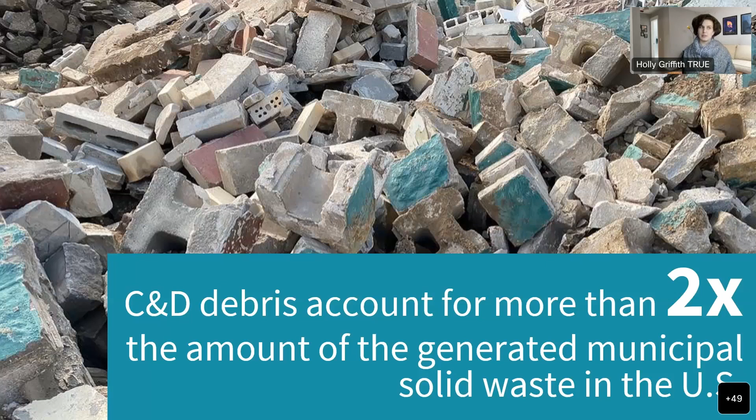We're generating a high volume of material and not diverting enough of it. And we need additional tools in place that can help support the reduction of cradle-to-grave management of material in this space. Certification is one of those tools.

Over the years, our community has identified this same need. Most recently, this was done by Genesis Marina, a 570,000 square foot commercial office and laboratory project that general contractor Webcor is delivering in Brisbane, California. This is the first TRUE pre-certified construction site. This project, alongside a couple of others, worked to adapt TRUE certification to fit their project prior to the pilot because they saw the need for dynamic zero waste in a construction setting.

But as these projects started their work, we were hearing the same thing from these teams: it was difficult to apply the standard TRUE rating system to these projects without some adaptation, particularly because TRUE is designed for existing facilities with ongoing operations, and construction projects are often new and term-limited.

Based on this feedback and our understanding of impact, TRUE saw a significant need to build something different to support zero waste in the construction sphere. There were 3 key impacts we homed in on that we can help provide support in. One, zero waste is needed at construction sites, and we can help provide a guideline for developers, architects, general contractors, and subcontractors to foster zero waste policies, practices, and strategies at their place of work.

Two, certification and the development of sector-specific adaptations can help increase the impact of zero waste practices at a wider scale. Having an achievement to shoot for and a way to reach it within the context of a specific industry can help more complex projects mobilize to improve their zero waste actions. And finally, three, we know there are construction teams doing really excellent work in the realm of zero waste, and certification can act as a recognition of this excellence, helping project teams showcase their successes.

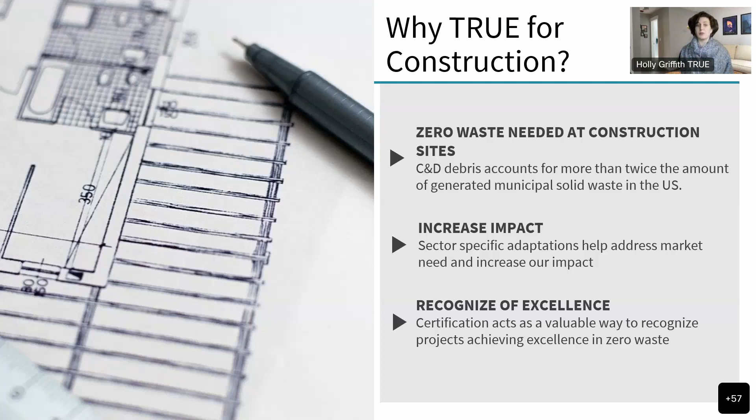For these reasons, GBCI decided to work to expand its offerings to construction facilities. And in summer of this year, we released the TRUE for Construction Projects Pilot, an adaptation of the existing TRUE rating system designed to certify new construction and major renovation projects. Through the pilot program, participating projects will evaluate their zero waste practices using the pilot guidance based on the current TRUE version 2 rating system.

By engaging with the pilot guidance, projects can ultimately earn TRUE certification for their actions and leadership, and share feedback on how we can improve along the way. This pilot will greatly inform the further refinement of a TRUE adaptation for construction projects.

So with that introduction, we can then ask, what does TRUE for construction look like? Well, first, of course, we need to ask: what makes a TRUE project? What do we need to make sure that we can certify folks?

First, we need to make sure we're certifying the full construction project. So we ask that projects provide their data from the day construction begins all the way up to the day that occupancy is achieved. This way we can make sure we're really able to say, yes, the full construction project is meeting true zero waste targets.

Then we want to make sure that everything generated on site and all activities happening on site are reported, be it from the construction itself, the trailer, or food waste from employees. If it happens on site, we want to hear about it. This can help projects really understand the full picture of what's happening on site. As we know, zero waste means all waste—you can't pick and choose. So we really push projects to understand what they're generating, where it's going, and how they can do better.

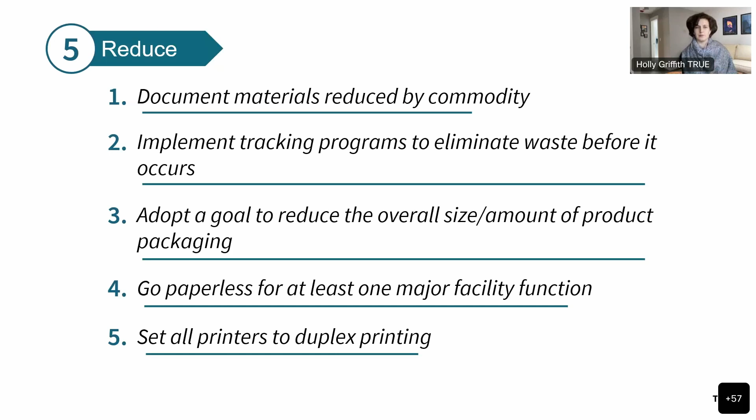Let's look at an example. Some of True is designed around the implementation of actions. Some is geared towards expanding on-site knowledge of waste practices overall. This is why we refer to it so frequently as a roadmap.

Or maybe it's identified that panelization is a strong design strategy to reduce waste. Or maybe reuse opportunities are identified through pallet and shipping container reuse, all of which may meet other True credit requirements and can be reported as part of diversion through the reduction and reuse reporting sections.

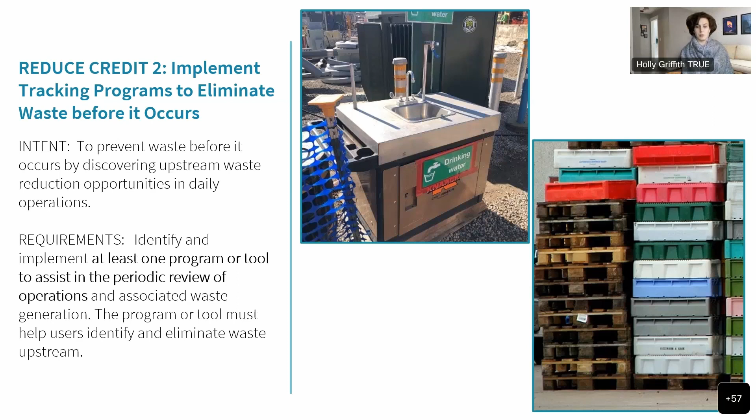In this way, True credits can feed off of one another to help project teams build towards a holistic zero waste system. For example, a project team might start with focus on Recycle Credit 1, which asks them to review all materials generated on site and assess if they're meeting their highest and best use. Maybe as part of that, they conduct a zero waste audit to assess what's really going where and if that's the best end use for that material.

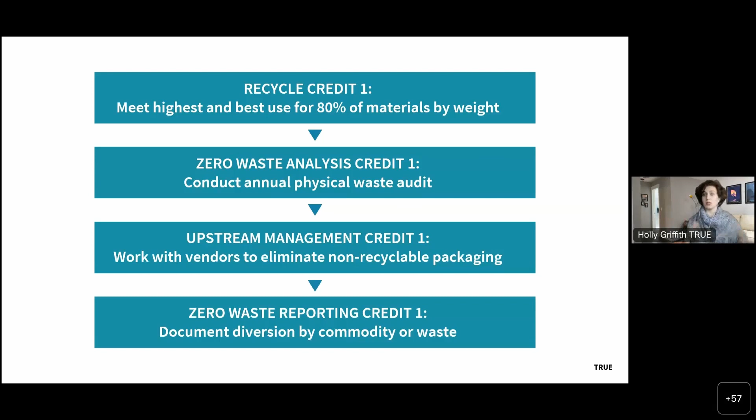During that process, the site may identify that they had a lot of non-recyclable packaging that could be made of better materials or eliminated altogether. This might address Upstream Management Credit 1, which asks sites to work with their vendors to eliminate non-recyclable packaging.

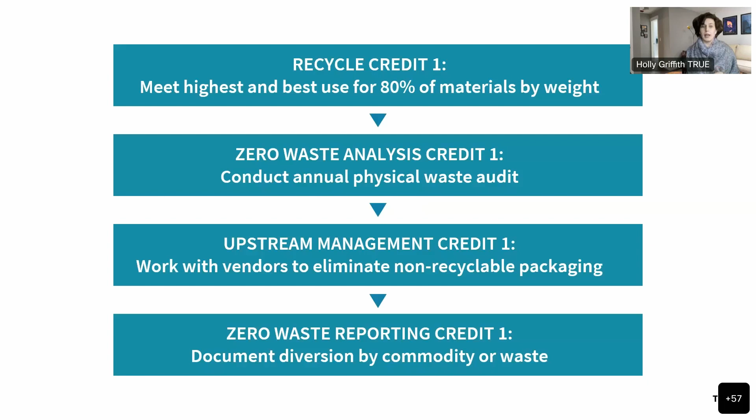Maybe the team decides to work with their vendor to have materials wrapped in metal bands rather than pallet wrap, like Webcor did, or maybe reusable pallets are implemented. Whatever it is, this can all be reported as diversion in Zero Waste Reporting Credit 1. As long as those materials are being diverted, they feed into that overall diversion number, which is why for construction, reduction and reuse are so key.

On the whole, TRUE is designed to support those linking chains, the building of best practices and strategies to create a facility or project that is taking on zero waste at all levels. It's our intent to now focus this pilot to support that goal in a construction context.

Now, to wrap us up, if you're interested in learning more, we have a few different resources put together for you. Let's talk about where you can get involved. We have 3 primary places you can look to learn more. First is our pilot resources platform, which contains resources to support the pilot, as well as updates and guidance on the process. This is the best place to see how things develop and find answers to frequently asked questions as they arise. We encourage anyone interested in the pilot to check this page frequently to see developments as they're made.

Our second resource is our webinar detailing the pilot more comprehensively. And the third is an article on our webpage, which provides a little more detail and overview on the development of the process over time. I'll share those links in the chat once I've finished today.

Finally, if you have any questions, please feel free to contact us at true@gbci.org. We're always really excited to talk about this process, so please drop us a line if you'd like to learn more.

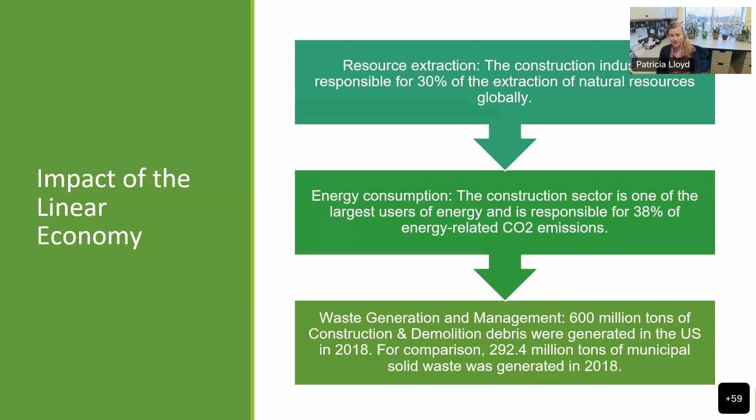Then there's waste generation and management: 600 million tons of C&D waste were generated in the US in 2018. For comparison, only 292.4 million tons of municipal waste were generated—still a lot, but you can see the mass of construction and demolition waste compared to municipal waste. It's a pretty big delta.

Next slide, please. Which means we have a tremendous opportunity. Construction is only going to increase between now and 2060 across the world—the equivalent of the city of Paris will be built every week. There are some other great metrics around this too: just in the next 3 years, annual construction waste is expected to reach 2.2 billion tons globally. So what are we going to do with all those resources?

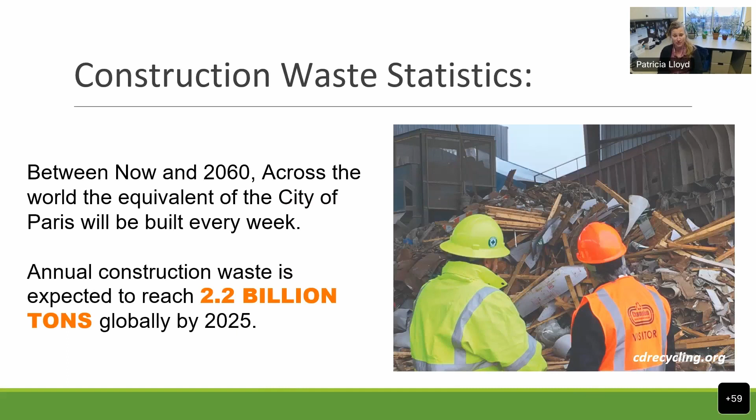Next slide, please. Annually, construction projects are dumping a lot of waste into landfills, and a lot of that is equivalent to 30% of the weight of all the building materials used to build the buildings. So even on site, we're having a tremendous amount of waste. There's a lot of material being created that is not reaching its full value on the job site. Next slide, please.

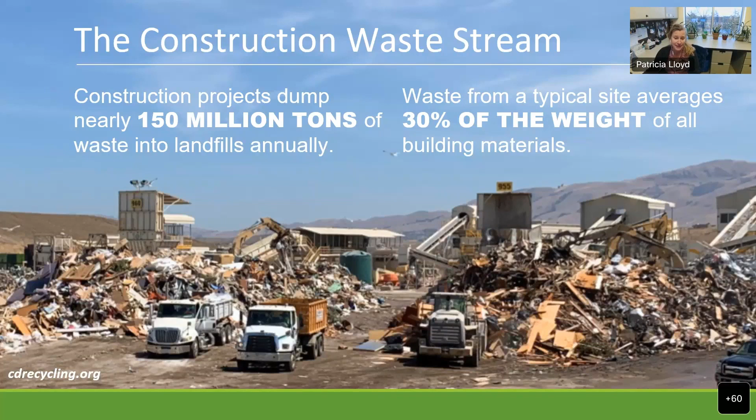There are challenges to zero waste projects, or really high diversion projects. To truly get to zero waste, if you have demolition involved, you have to have deconstruction processes. There's often not enough time in the construction schedule or enough money to selectively demolish and capture value. In the reuse market, particularly for commercial construction, there's not enough stability to make sure materials are there when they're needed. I call it the design-to-build gap: the architect looks at the project, specifies a reused material, the contractor gets awarded 8 months later, and that particular material is no longer in that reuse retailer's possession.

That's just one example of the problem. There's also inundation of certain commodities and a lack of others. A lot of these resellers are set up for the residential market, so they can't take 2,000 ceiling tiles from me.

This creates some challenges with commercial construction. But there's real reasons why commercial construction needs to be addressed, because the waste stream from commercial construction and demolition is so much greater than that from residential.

One of the things I'm going to talk about a lot today is building material reuse. And with that subject, there are quality, warranty, and hazardous unknown issues. One of the greatest barriers to deconstruction and building material reuse is cheap landfill costs.

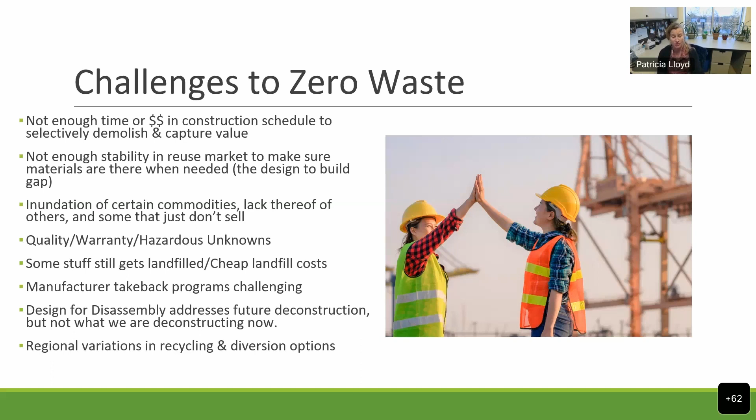The Ellen MacArthur Foundation is one of many groups that have done a tremendous amount of work on the circular economy and construction. There are three impactful circular economy strategies specific to the built environment: making better use of existing materials, designing spaces in ways that eliminate waste, and reusing and recycling materials. By applying circular economy principles to buildings and construction—sharing buildings more, reusing and recycling construction materials—we can reduce the emissions from construction materials by 38% by 2050. That's an enormous impact we have the potential to make.

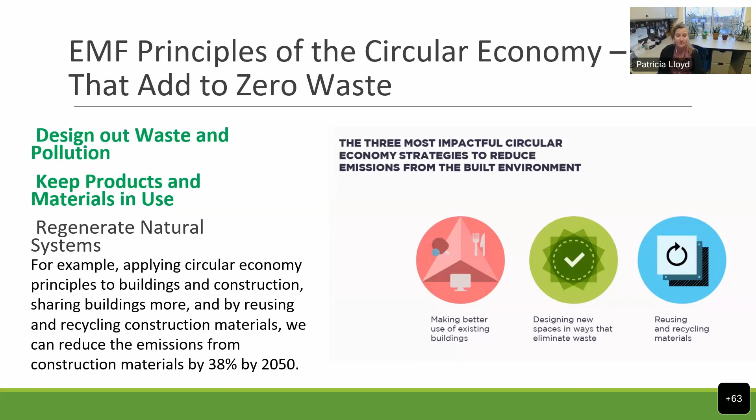This poster was done by Andrew Ellsworth. He's with Doors Unhinged in Pittsburgh, one of the only people actually salvaging materials in the commercial market and then reselling them back into it. What Andrew found through his research is a huge high-churn issue in the tenant interiors market specifically—office buildings where the lease turns over every 5 years, and those tenants come in and put in new carpet, new ceiling tile, completely new finishes.

So this creates a tremendous amount of waste, and it's very cyclical. There's tremendous opportunity to practice materials reuse strategies—salvaging those resources and getting them back into the reuse stream. Because as it's been said over and over today, recycling is not the highest and best use; reuse typically is.

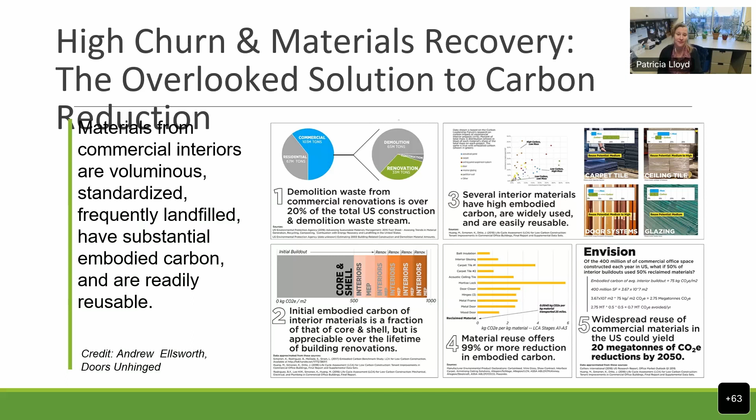There's another opportunity, which is surplus. I've been in construction for like 20 years and I'm really embarrassed to say I never recognized this as an opportunity to keep materials out of the waste stream. Surplus is materials left over at the end of a project. It's not the same as salvage because they were never installed—they're new, they have material data information on them, they're often new in box, but the amount can be significant.

Most construction contracts have a requirement for attic stock, which is materials left for the client for replacement and repairs. Sometimes those are pretty significant amounts, and the owner doesn't have anywhere to put them, so they'll get rid of them. These materials are a great stream to go straight to reuse retailers for sale.

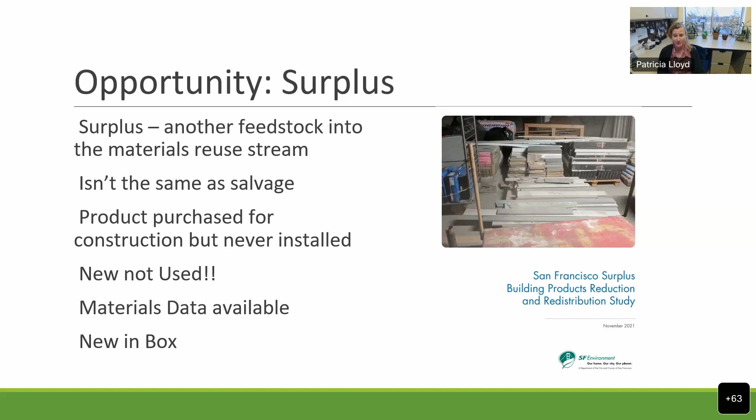There's a lot of opportunity through materials recovery via deconstruction. I love this quote from the US EPA: deconstruction is a new term to describe an old process—the selective dismantling or removal of materials from buildings prior to or instead of conventional demolition. Conventional demolition is all about clearing the space for construction in the most efficient way, both by time and cost, and that's usually what we as a GC get paid to do in our contract. So really changing that paradigm from the ownership and design perspective to include more time and dollars for it.

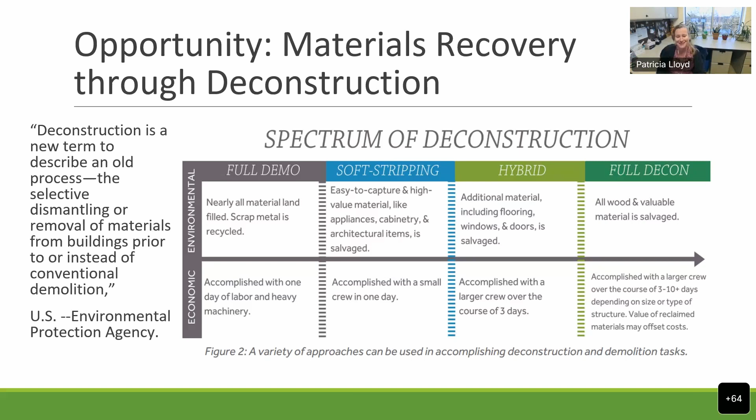Build Reuse is a great organization if you want to learn more about this. They're a national organization, and they talk about some different ways of reuse: adaptive reuse of a building's structural elements, component reuse of materials available on site, reusing construction materials from elsewhere, and secondary use of non-construction materials.

Beyond the materials, there are tremendous workforce development and community benefits. Just like Holly was talking about the pollution impacts to people living near landfills, there are also benefits to reuse beyond reducing what's put in a landfill, and that's workforce development and community benefits.

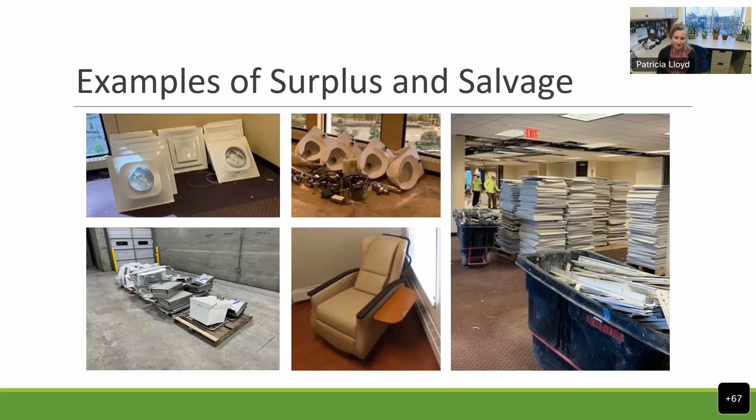It also shows who the deconstruction subs are in your site, what the ordinances are, who the haulers are, so it really helps to gain knowledge of your local reuse scene. I thought I knew everybody in my area, and I found 2 firms on the Illinois part of the list that I was unaware of. It's great stuff.

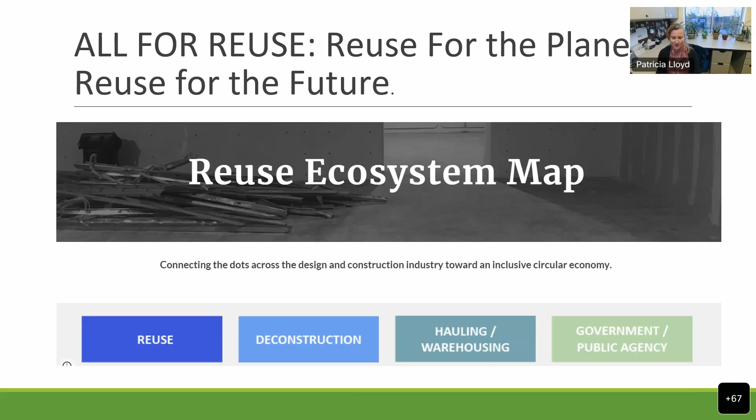We donated ceiling tiles for reuse. One of the subs took the doors, refinished them, and used them on another project. We ended up milling the asphalt parking lot—that's not reuse, that's recycling, but there was a lot of effort and planning put into it. These projects with high waste diversion just don't happen without planning and integration of the project team.

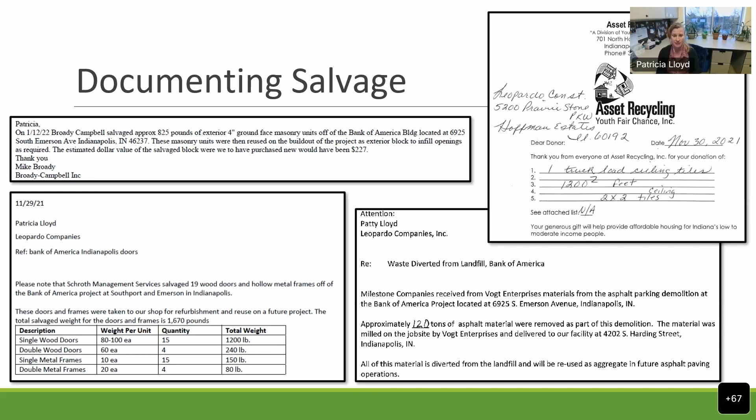So here's just an example when I say not one path. I think we had six paths on this job to get to that 96% waste diversion. This wasn't a true project, I wish it would have been. I don't think the pilot was going yet, but this is a great example of all the different organizations on one project that were engaged in hitting a high diversion and capturing all those resources, both for reuse and recycling.

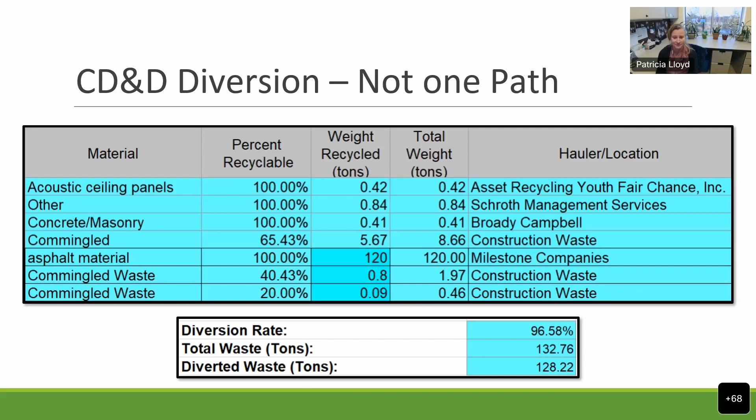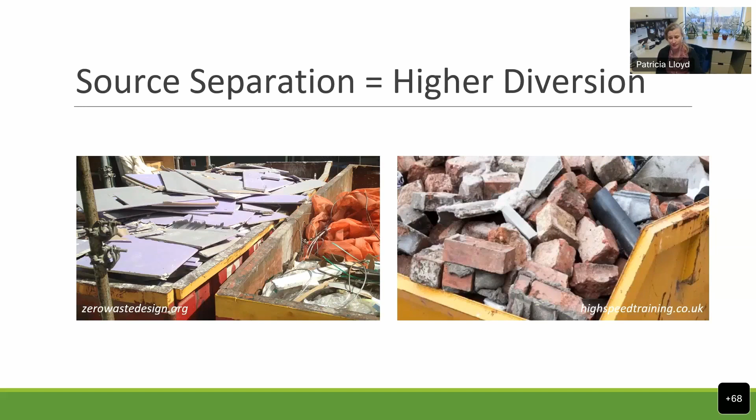The highest way to get diversion of all waste is through source separation. It's not always feasible, but I would be remiss not to talk about it. If you can source separate things, you reduce contamination. So this is a definite strategy for highest diversion and recapture of resources.

There's a lot of criteria, waste diversion, deconstruction ordinances coming around that are really going to push this industry in a very meaningful way. Understanding where there are waste diversion or deconstruction ordinances matters. I recently spoke to a deconstruction contractor, and I asked how much that deconstruction ordinance in her area had driven her business. She said 75% of my business is because of this deconstruction ordinance. So I thought that was a pretty meaningful metric.

And then I like this quote from Eden Brukman from the Department of Environment at San Francisco: material rescue and reuse epitomizes climate action for the building industry. It honors the embodied carbon by upending the prevailing linear take, make, waste pattern. I think it's really important to point out the term climate action in that phrase, because a lot of people do not connect waste diversion and resource recovery with climate action, but it certainly is. There's a ton of cities that have included zero waste, deconstruction, and principles like that in their climate action plans.

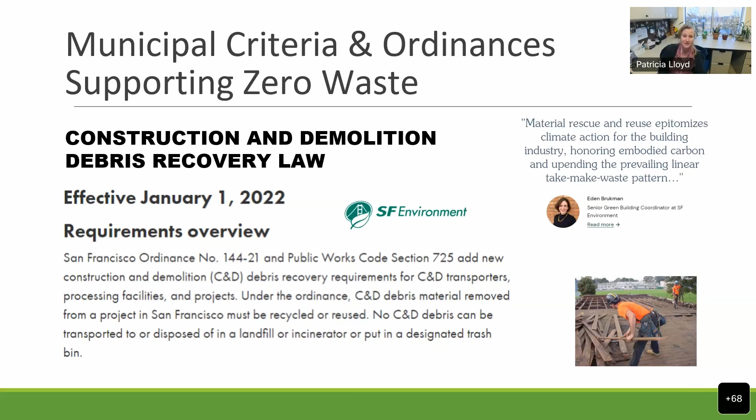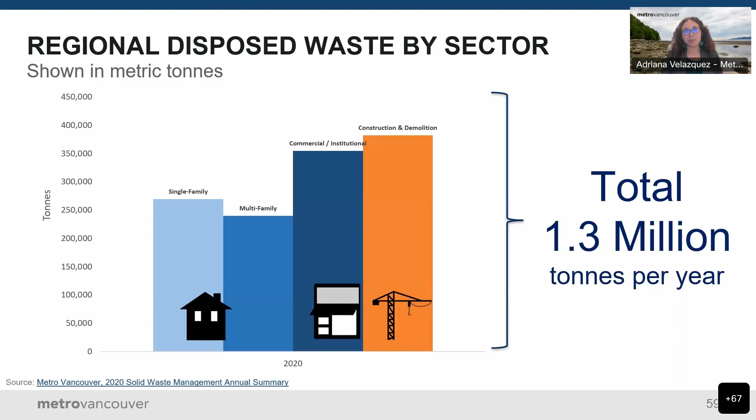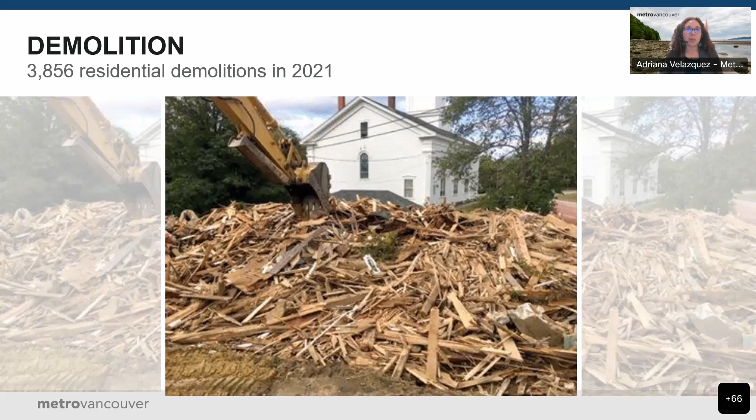In 2021, the number of residential demolitions in Metro Vancouver was higher than the previous 3 years, and it was also higher than the 10-year average. Most buildings at this point in the region are still taken down by traditional demolition methods, and as we know, this makes building materials unsuitable for reuse or recycling.

In Metro Vancouver, the C&D sector experiences a high diversion rate compared to other sectors, mainly due to recycling of concrete and asphalt. However, if we remove these two materials, the diversion rates lower significantly. There is a great opportunity to take other materials out of the garbage stream, and this is especially true for wood products.

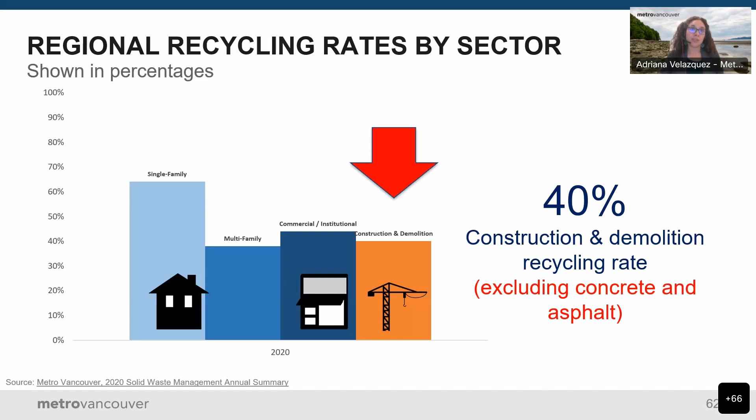Based on the 2018 C&D waste composition study, about 60% of the total disposed C&D waste in the region are wood products, and some of them can actually be rescued at earlier stages.

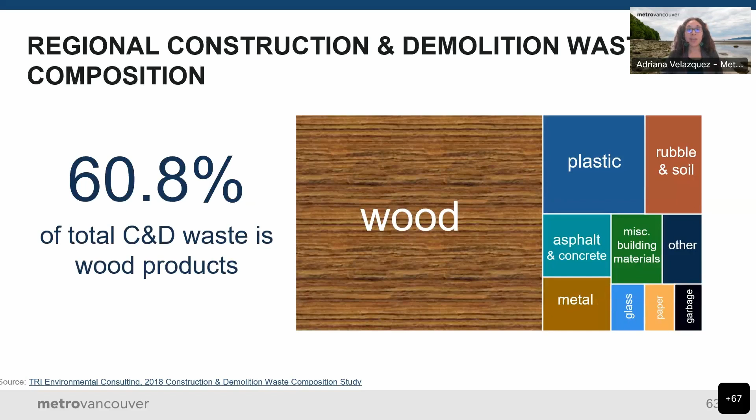To encourage reuse of building materials, Metro Vancouver has been working on a set of different key initiatives, one of them being the C&D Waste Reduction and Recycling Toolkit. Back in 2008, when we first published this toolkit, the focus was on recycling of building materials. However, with time, this has evolved, and now our focus is to encourage reuse. Through the toolkit, we collaborated with different leaders in the industry to increase awareness on best practices for the construction and demolition sector.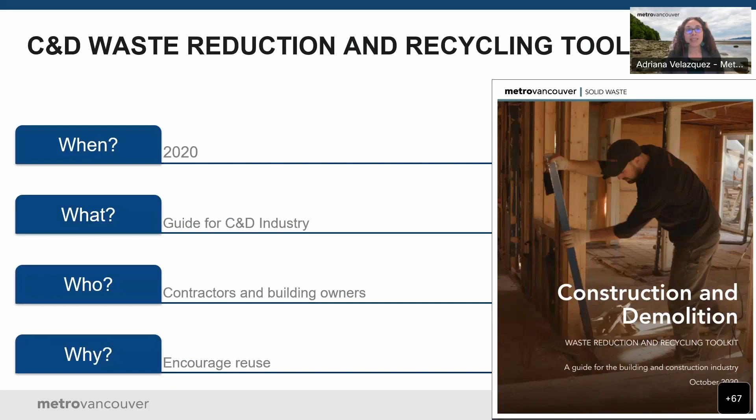An example of this is that we now have a section on alternatives to demolition that provide practical guidance based on the project's unique needs. For example, we suggest adaptive reuse for some projects. This is a relatively new area for policy in Metro Vancouver. We have seen different plans that include it, such as the City of Coquitlam's Environmental Sustainability Plan, which has an action to encourage adaptive reuse of existing buildings.

However, not all projects are feasible for adaptive reuse, and in those cases, maybe house moving could be an option. The City of Richmond encourages homeowners to list their house for relocation through the House Moving and Salvage program.

If house moving is not feasible for the project, then either full deconstruction or partial deconstruction could be an option. The City of Vancouver introduced a deconstruction requirement for specific properties and provided funding for the establishment of a deconstruction hub to provide a central location for contractors to bring salvage materials for reuse. The District of North Vancouver is launching their new requirement for wood salvage from pre-1950 homes in early 2023. Even if full deconstruction is not possible, valuable items can still be recovered from a building.

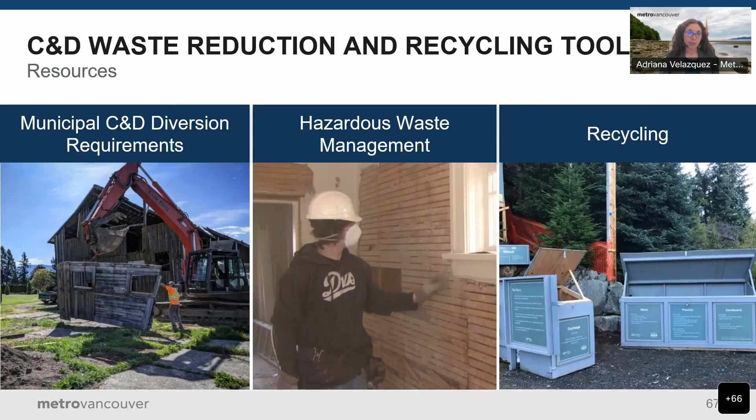To help contractors and waste management companies meet municipal C&D diversion requirements, the toolkit also includes guidance on setting up on-site recycling stations, as we can see on the right of the slide. It also provides guidance on how to manage hazardous materials commonly found in C&D sites, such as asbestos or lead, and a directory of service providers and facilities.

In addition to the update of the toolkit, we have included an online tool that helps contractors and waste management companies estimate how much waste will be generated from residential projects, and also what the minimum recycling requirements are, set by the municipality in which the project is located. The user just needs to provide the floor area, choose the municipality, and select the units they want the displays to be presented in the tool.

Also, at our recycling and waste centers, we have programs to encourage recycling and keep hazardous waste out of the landfill. Through our disposal ban program, inspectors look at incoming loads, and if they contain 5% or more clean wood or any quantity of gypsum, they are issued a surcharge.

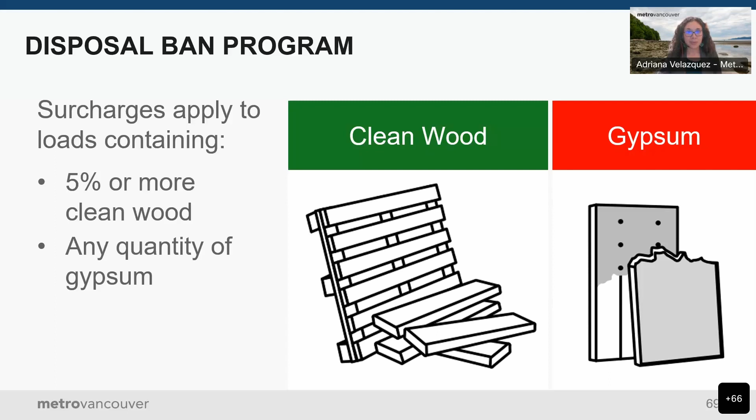While the disposal ban program targets large loads from commercial clients, Metro Vancouver also has developed special recycling and disposal programs to support residents in managing their leftover materials. Anyone doing a do-it-yourself renovation can bring new gypsum cut-offs for recycling and used gypsum for safe disposal without requiring a laboratory test for asbestos, at any Metro Vancouver recycling and waste center.

Again, we know there's more that needs to be done, and we want to move building materials up the waste hierarchy. Markets for materials is a key challenge for construction and demolition materials, and to tackle this, Metro Vancouver continues to do research on how these markets can be expanded.

Through the UBC Sustainability Scholars Program, Metro Vancouver carried out 2 research projects for salvage and reuse in the built environment. The first one in 2019 evaluated the effectiveness of online marketplaces to promote reuse of building materials. Last year, the study explored options to divert building materials commonly found in single-family homes built after 1970 in the region. You can find these studies under the project library section of the Sustainability Scholars Program.

I'm happy to share the link if that's of interest.

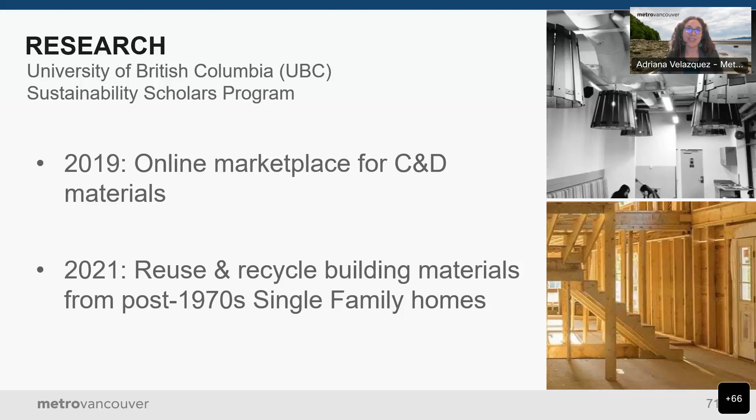A recent report by the Pacific Institute for Climate Solutions found reuse of existing building stock is almost always more effective in reducing climate impacts than new energy efficient construction. Metro Vancouver has already incorporated reuse in our toolkit in line with these findings.

In addition, we are working on our circular economy and 3R study, which will include a look at some global and local initiatives that we might consider as we update our solid waste management plan.

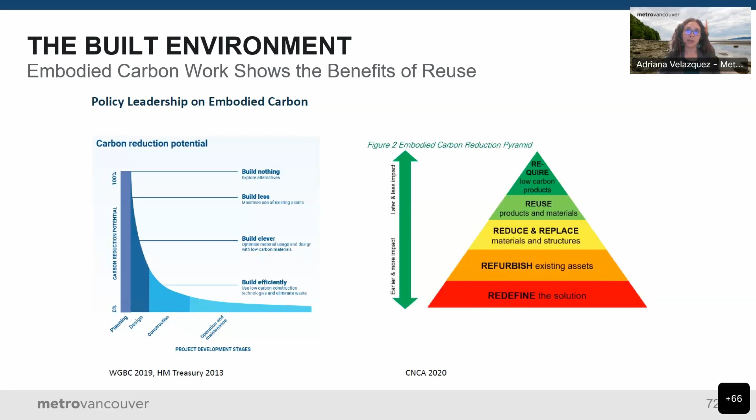Last but not least, Metro Vancouver founded the National Zero Waste Council to support Canada's transition to a circular economy by bringing together governments, businesses, and NGOs to advance waste prevention initiatives. Some recent C&D projects undertaken by the Council include a recycled asphalt pavement toolkit and also a wood waste pilot.

The recycled asphalt pavement toolkit is based on the results of a pilot of 40% recycled asphalt that was laid in the city of Richmond in 2020. The online toolkit provides information and resources to encourage other asphalt producers and buyers to take up similar projects in their own jurisdictions. This toolkit has lots of very useful information, including the technical assessment framework that Richmond used to assess the RAP project.

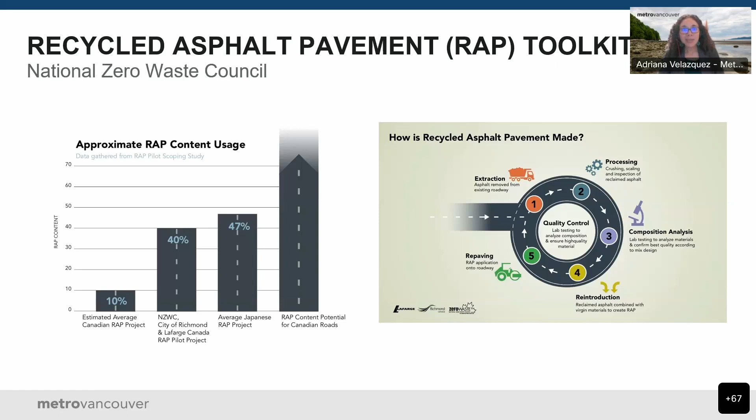Next slide, please. As we mentioned before, wood is one of the largest waste components in Canadian landfills. The wood waste pilot is an opportunity to assess the economic feasibility of transforming wood waste into an actual product by investigating what markets may exist and whether investment potentials exist as well.

For this project, the lab will manufacture a particle board using wood waste. This research also seeks to respond to the global shortage of engineering wood composites and understand how this model could be applied in other geographies across Canada. This is a great example of multi-stakeholder collaboration, working with academia, industry, and government.

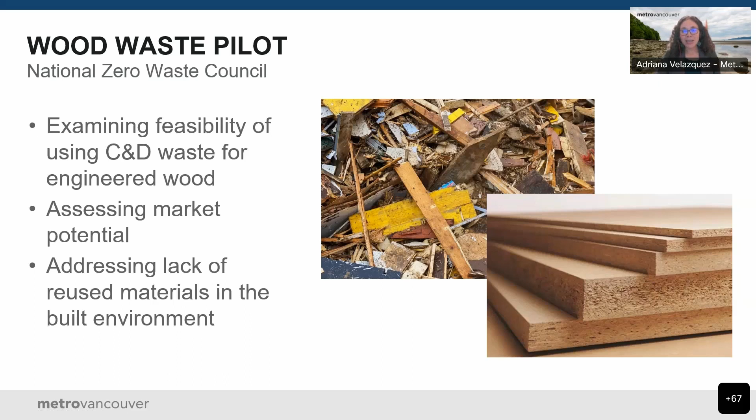Next slide. And with that, I will wrap up my presentation. Thank you so much for your attention.